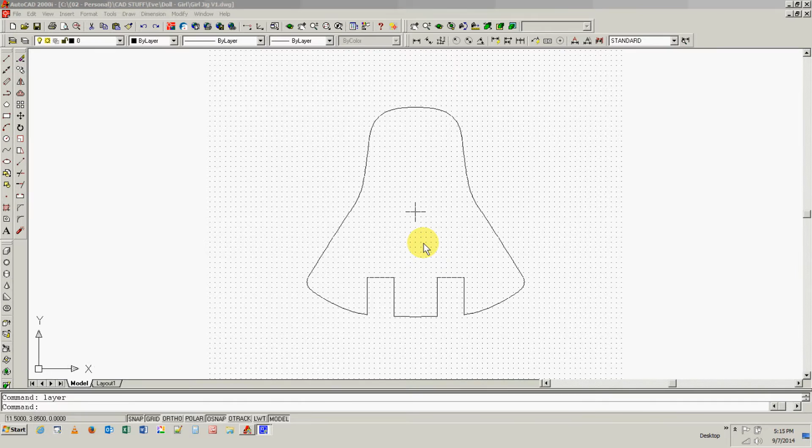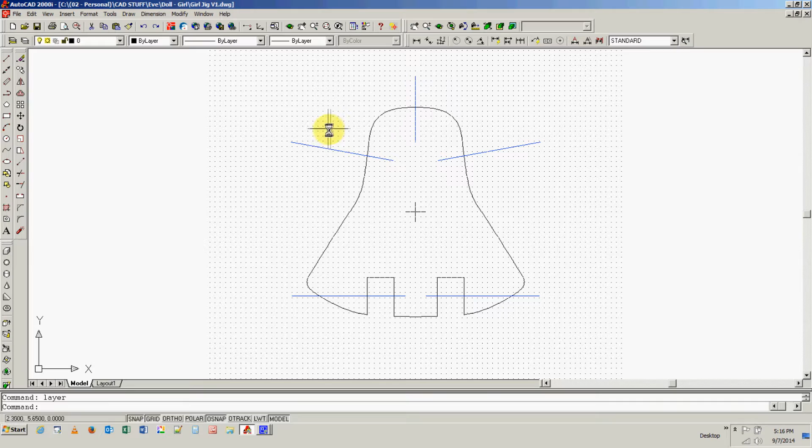This is the doll body that Eve wants to make, and to do this we have to drill some holes in that. So I'm going to pull up my layers here, and I'm going to show you what needs to be drilled. So you can see I need to drill a hole here for one arm, a hole here for the other, one for the head, one for this leg pin, and one for this leg pin. And to do that, you can see that I can drill straight down to here, but on my milling machine the head doesn't move, so I couldn't reach this unless I rotate everything.

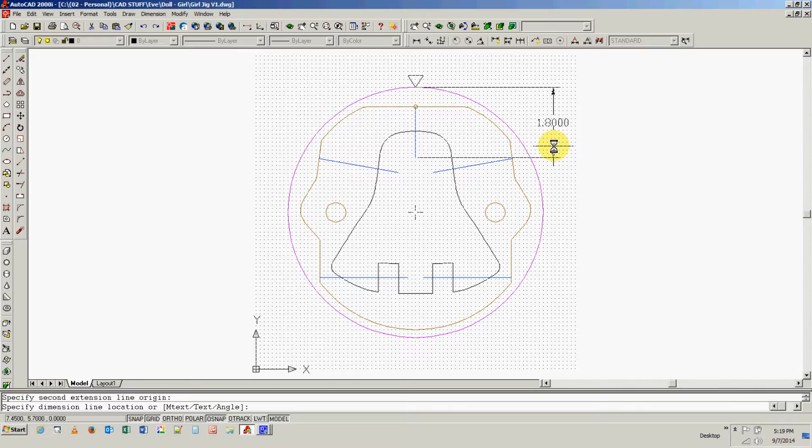So now we've got a 0 point of reference. And I can measure from that 0 point down and figure out how far I need to drill. So for the first hole, it's pretty easy. I can specify from here to this point here, and I know that I need to go down 1.8 inch. And I'm going to specify that as the base point, and I'm going to rotate it by 80 degrees.

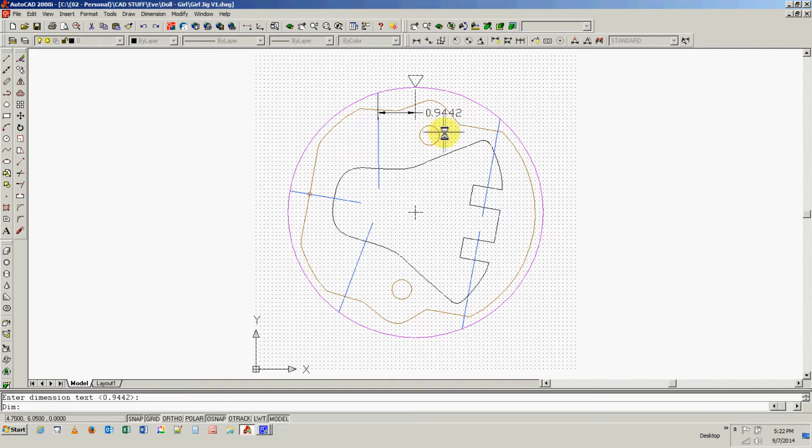So now this little piece here should be vertical, or vertical enough for our estimation, but you notice that if I was to drill, it would drill down here instead of over here, and so that's not right. So this point needs to move some distance. So in this case it's 0.9442. So I know I need to move the whole thing over 0.9442. Then I can come in here and drill.

Then what I would do is rotate this around and do another offset for this point, etc., and do each of the different points. And once I've plotted that out, I can make up the G-codes and then bring it out to the machine. So let's go there and take a look at that now.

So here you can see I've got the jig mounted up, and it's screwed in with these two holes right here. And I'm not using a drill, I just have a bolt in there because this is just a demonstration of how it would work. And these are the paths that we want to drill to get into the different parts of the doll body. So what we would do is cut a piece and set it in here, and then we would drill it. I just left it out because this is a test piece to test out my code, and I wanted to show you how it works.

And since we're not actually cutting, I'm not going to start the big noisy machine up, but let me give you an idea of what would happen here. So you see it would go down and it would drill the first hole, then it'll retract to a safe distance, it'll rotate around, do the 90-degree hole, and it's going to rotate. You'll notice it'll move back.

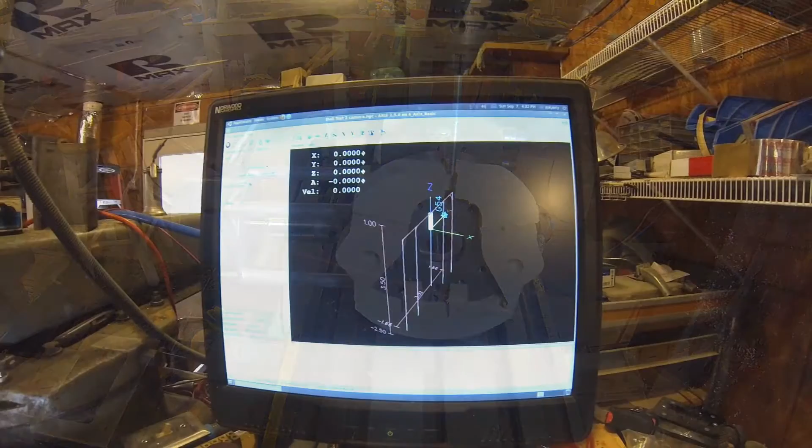It'll do the last arm position, then it'll return to the 0 point. And see, at that point I would take the unit out and drop a new one in and start the process over again. Now what I'm doing is I'm showing you what the actual program looks like.

And if I come over here and start it, you notice it doesn't have a way of showing me the rotations. It thinks it's moving back and forth only, so it doesn't understand rotations. But if I clear out the path and I start this, you can see how it moves up and comes down and does the first drill. Then it comes up again and it starts moving over again.

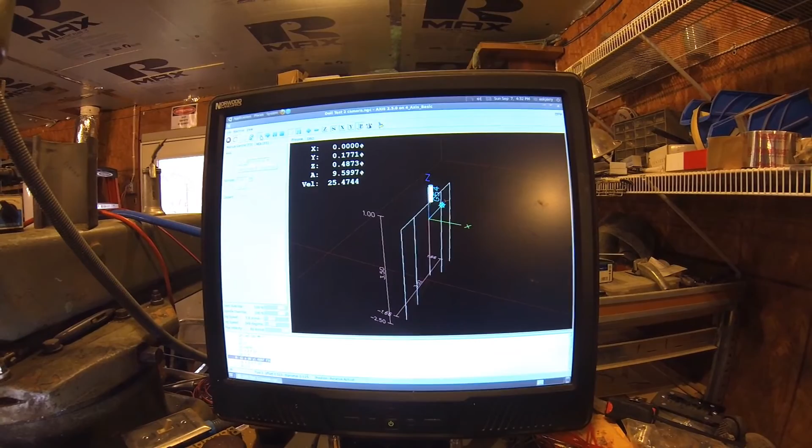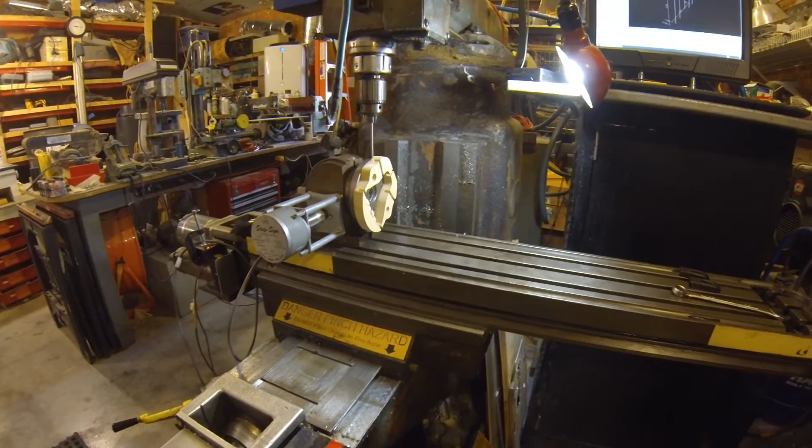What it's actually doing is, in addition to moving over, it's doing the rotations. And you can see how the head not only turns, but the table itself is actually moving. You'll notice down in here, this is the y-axis indicator. Especially on this next one, you'll see this come back.

And then it'll do the last hole. And then this is the motor here. You can see it spinning. And all done, back to the 0 position. Basically, that's how it works.

And I end up having to hand program that section of it, but for a lot of the 3D carving and stuff, I can just go to the Aspire software. So sometimes you still have to learn enough G-code to do some manual programming. So if you're interested in doing CNC, you might want to study up on it, because sometimes you will have to tweak the code. Thanks for watching.